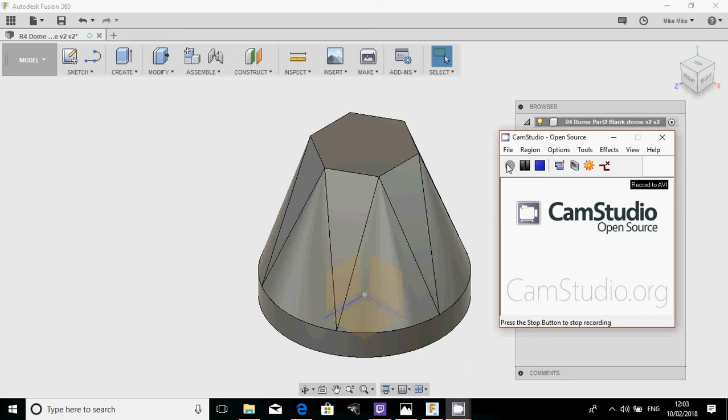This is episode 3, and what we're going to do is start to add some detail. So, recap on last time. What we did is we created the basic shape, we hollowed the shape out, and now what we're going to do is add some detail. I showed a little bit how we add detail, but what we're going to try and do today is recreate the R4 Dome that is in A New Hope. So we're going to start the ball rolling on that.

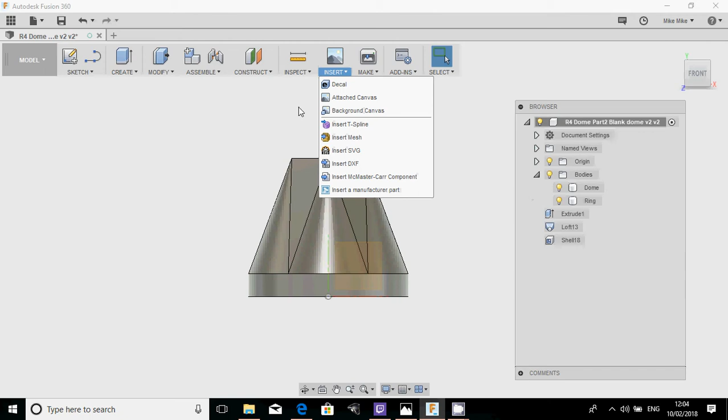So as well as designing the dome, this is also about showing you different tools, different techniques, different features. And today I'm going to show you a good way of looking at references. In Fusion there's something called canvases, and if you click on insert and attach canvas, a canvas is an image that you can attach to a plane as a point of reference. So I'll just show you how that works.

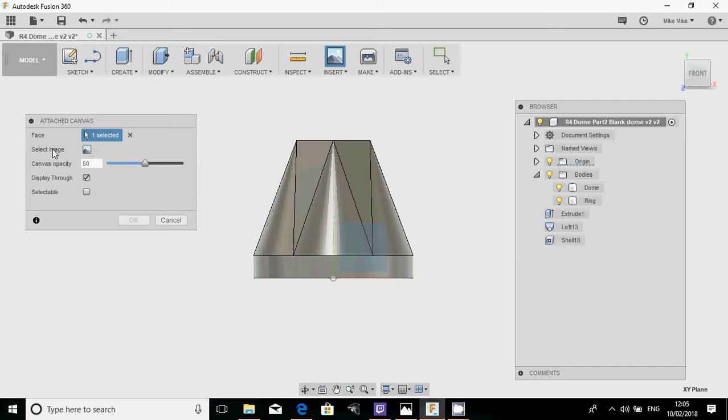So attach canvas, first of all it asks you for a face. As we know, you've got different faces. We're going to select, if you're looking from the front, the main face that you can see. It will then ask you what the image is. I'm going to use, in true Blue Peter style, one we prepared earlier, the reference image, and what that's actually done is it's attached the dome to this canvas. Now you can see that picture is very tiny, so we're going to resize it.

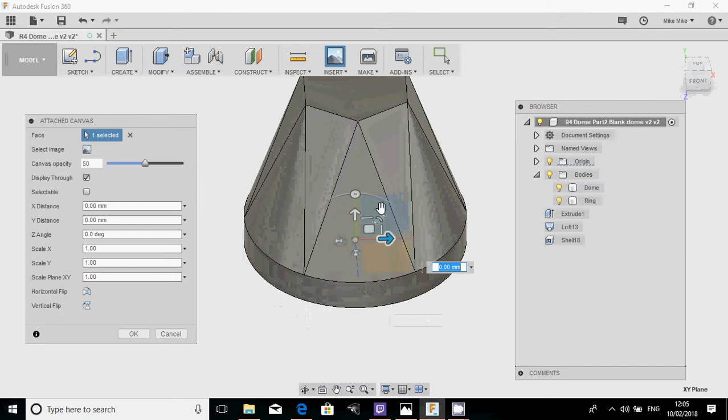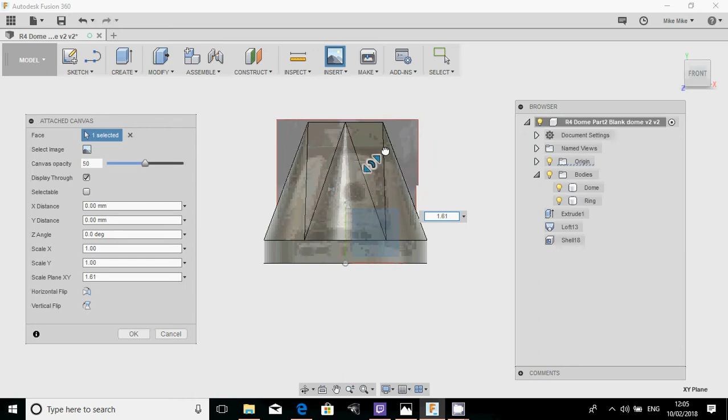Now, I didn't really go through a lot of these tools for moving and sizing objects, but what you've got is effectively this little bar and a slight curve bit that allows you to resize things. So I'll show you what that means. You drag that and you move it and it makes it bigger. You drag it again and move it, makes it bigger. So we're going to use these arrows to move it around in space, and effectively we want to make the dome roughly the same size as the one that we're actually creating. And also we might want to tweak the angle a little bit so it's a little bit straighter.

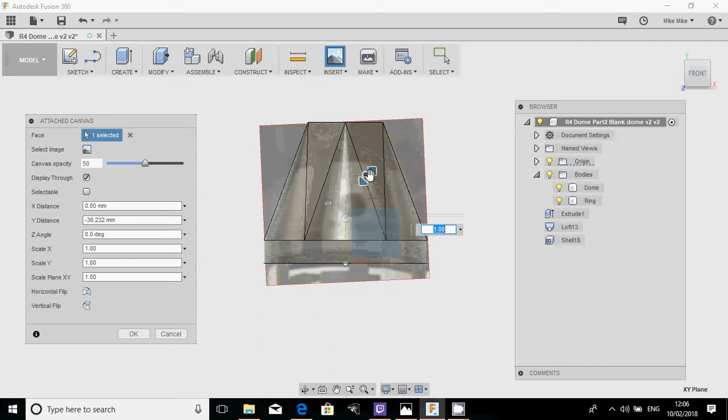So really all you're doing is putting a little bit of a backdrop of something that can be a reference image for some of the size and scale things that you're doing. Obviously if you've got blueprints with measurements, they are a lot more accurate, but where you haven't, this is quite a good way of pulling in reference material from movies or images that you've seen on the internet. So effectively that will do.

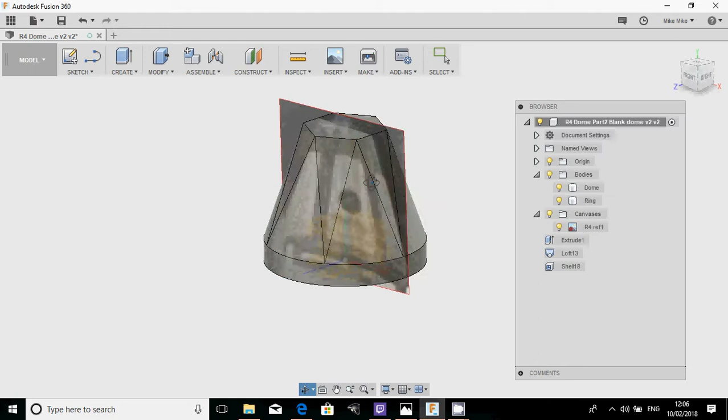You can also do all sorts of things. You can make the canvas darker, less opaque. You can make it selectable, so a bunch of stuff on there, but I'm just going to add that in there. So what that gives me now, as you can see, is an attached image at the back, which is a bit of a reference. And what we're going to do is effectively start to cut this up now so that we can start to add the detail.

So the first detail I'm going to add is this top green piece, and then I'm going to add these arms going down. And I want to make them not as panels, but having channels between them, a bit like R2D2 panels have. Now I know the panels in R2D2 have a 1.54mm gap. So first of all I'm going to go to sketch and select line. I press the L key for that because shortcuts tend to make things quicker.

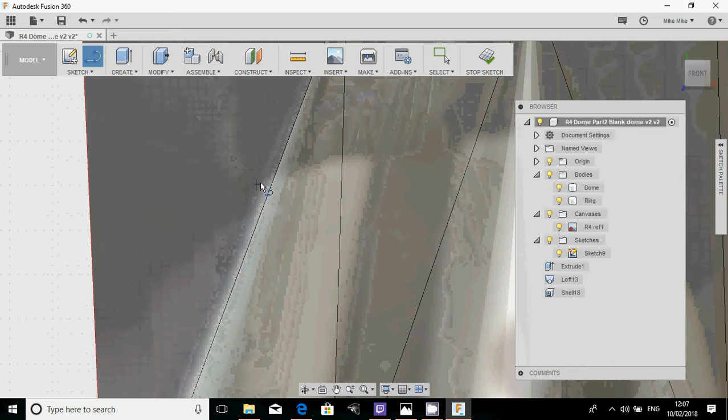And I'm going to select that back plane. And what I'm doing first of all is I want to chop this piece here off. So I'm going to take a rough guess of where I think I want to chop it off, which will be up there. I'm going to pull it out at whatever length, at 180 degrees. And I'm going to pull it back down 1.54mm.

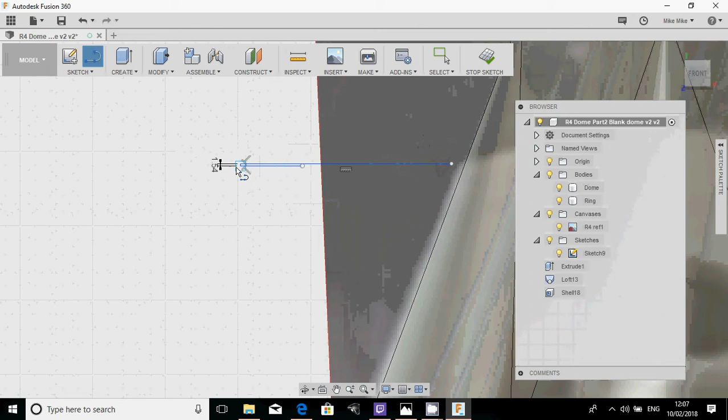And then I'm going to pull it back again a little bit. It doesn't matter how much. And then once I've done that, I'm going to click OK. So what I've created there is almost a little bit of a sketch loop out, down and across. And I'll show you why we've done that when we start to cut it. So I'll click on Stop Sketch and I'm just going to split that body.

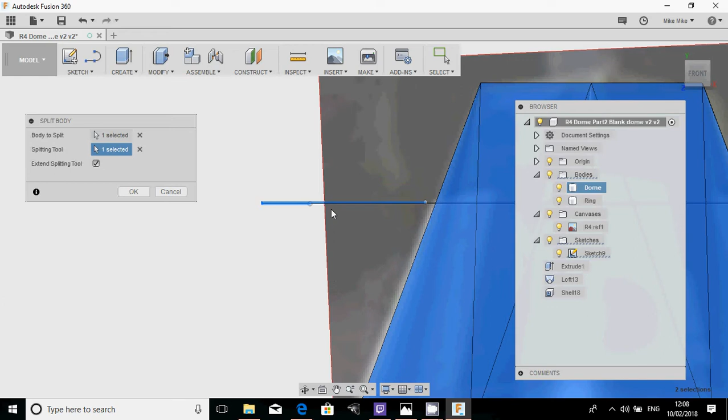So Modify, Split Body, select the dome, the splitting tool, I'm just going to select that tool. So what's happened now is because it's a continuous sketch, the knife kind of goes back on itself and zooms out across the dome like two laser beams. Click OK. And what it's done now is it's created that extra piece in the middle here, which is the detail. So the dome now consists of 3 parts, which is the top, the middle and the bottom.

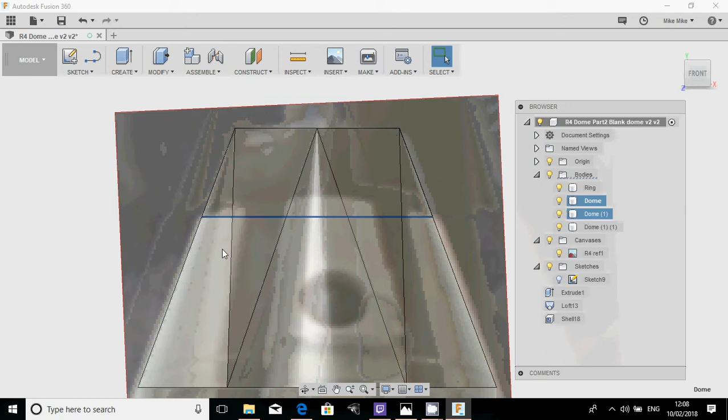So that lets me now add some more detail, which I'll show you how to do. The next thing I'm going to do is these vertical lines here. Okay, so those I know are sketched onto this panel here. So what I'm going to do is I'm actually going to try and sketch these on top, and I'll show you why I'm doing that in a minute.

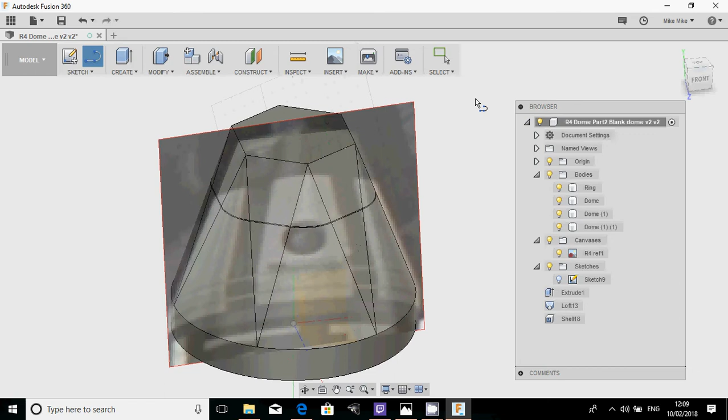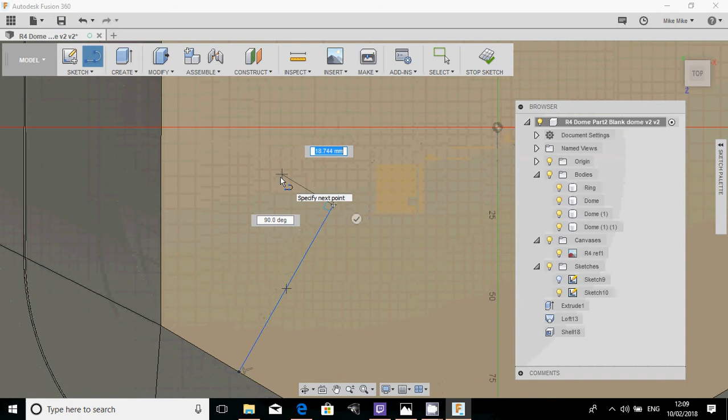So I'm going to look at roughly the size of them, and I'm going to press L, and on the top of them I'm now going to create a couple of lines. Okay, so I'm going to pull it in to probably, let's go for about there, and then I'm going to draw that line at exactly 90 degrees to that space there. Okay, same as before. 1.54 mil, tick. I'm going to do another one at an angle there, and I'm going to go back out like that. Tick that like that, okay.

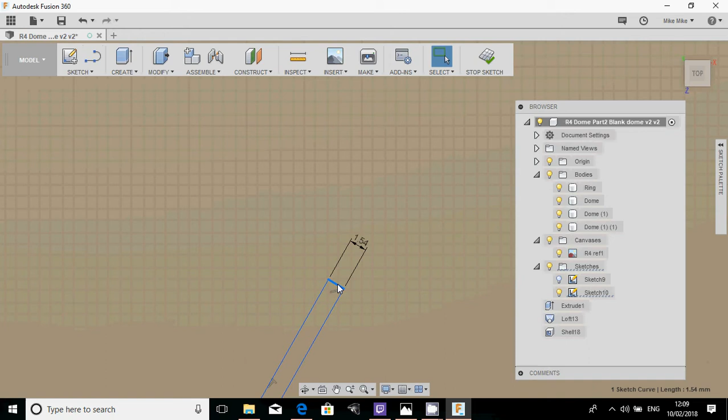But this time I'm going to hit escape to come out of line, so I'm just going to get rid of that little joining line there, and I'll show you why in a second. So that now is effectively, if I cut that there, let me just show you, modify, split body, and you can select multiple parts when you're splitting, and I'm going to select one of those lines, okay, and then what I'm going to do then is modify, split body. Remember, when you've used a sketch it disappears, so you have to bring it back on.

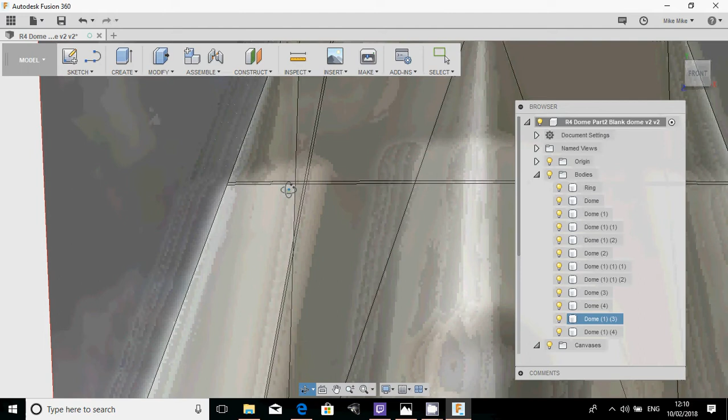I want to now split with that second line, and I'm effectively going to split all of the dome, so I'm going to select all of the dome pieces there, and I'm going to select that second line there. Okay, right. So what that's done now is, go to front, it's created that detail line, so I can look at this and say, does this look about right? If anything, it probably looks a little bit too thick. Let me just have a look at that.

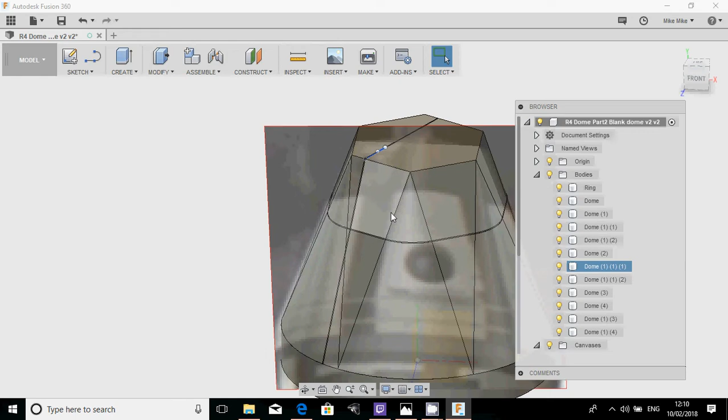Just look at the picture. So there's your lines, right? No, actually, I'm probably happy with that. And because you're working off images, this is what you've kind of got to do to see how accurate it is, and you can always tweak it later on if you want to. So that's given us one of the lines. Now, just after testing that, I'm just going to undo that so we remove the cuts. I'll show you why we're going to do that in a second.

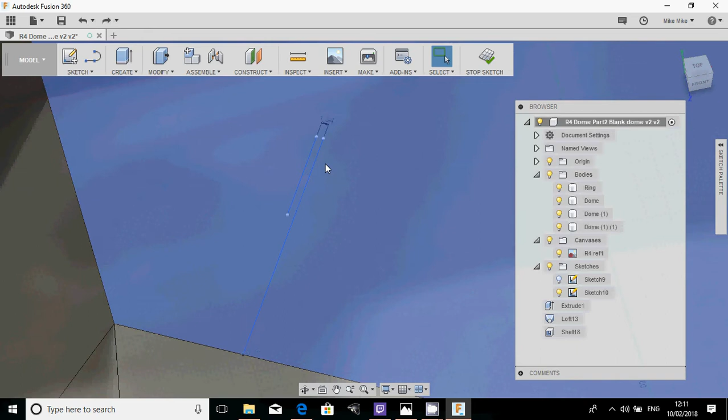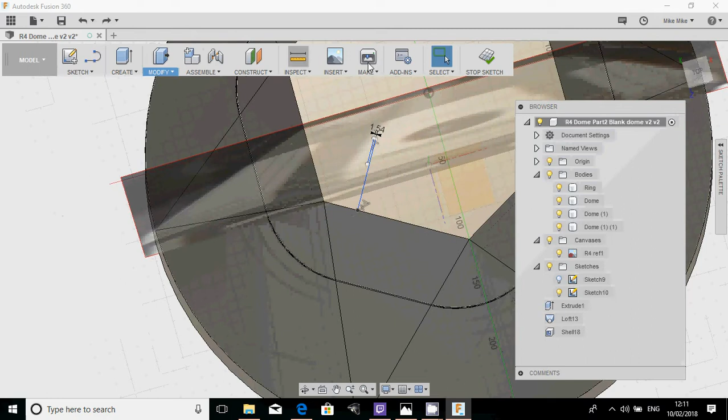Okay, so I just want these two lines left here, and I'm still in sketch mode. The next thing I want is the same on this side, because this effectively then creates that band. And the way I do that is I'm going to use some sketch commands. First one I'm going to use is something called mirror, and I want to mirror this line along the center here. So first of all, if I click on sketch line, what I've got to draw is a reference mirror line.

So if I hover along any line and you move it to about the center, it will find and lock into the center, and that's going to be the mirror point for these two lines here. So I've done that, tick, and then I'm going to go sketch, mirror, and I'm going to select both of those lines, and the mirror line I'm going to select is that, and that will create a perfect mirror for me, so I can start to cut the dome up. Okay.

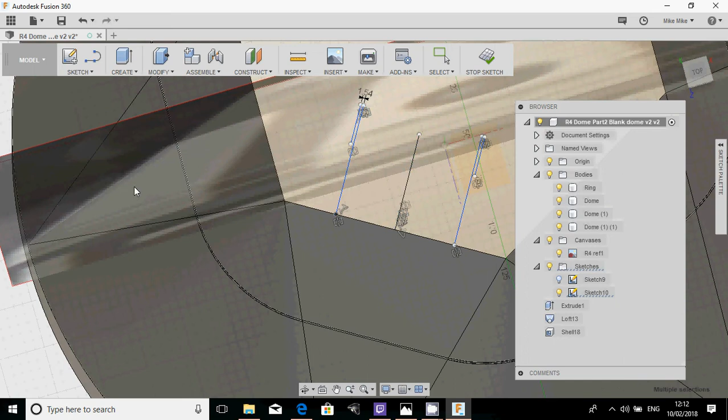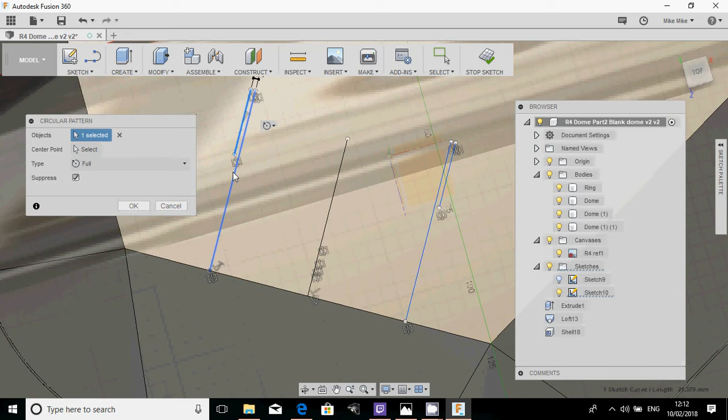Now, that's great, but actually I want to cut all of the dome up. So what I'm going to do now is a sketch. Instead of using a mirror, I'm now going to use a circular pattern. We saw this with the objects, but you can do exactly the same with sketches. So I'm going to circle that one, that one, that one, and that one.

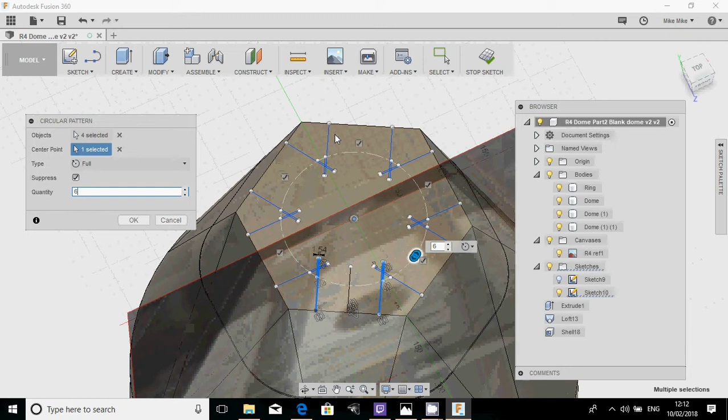The center point, I can select the center point here if I want to, or as I've always done, you can, but it's got to be a sketch that you're selecting. So I'll select the center point on there. And you can see now that's started to do 3 of those. I actually want 6. So now I've got the lines to cut all of the dome. I'm going to click OK.

So the next thing I'm going to do is chop the dome up. Now this will mean that I will have loads of pieces in here in the browser, but let's just go through that process.

So I'll stop sketch. I've got my sketches up there that I'm going to start to chop the dome up. So modify, split body. I'm going to select the top dome, press the shift key and select all of those, and the first line I'm going to select is one of those sketches. As always, when you've used a sketch it disappears, so I need to make it reappear again.

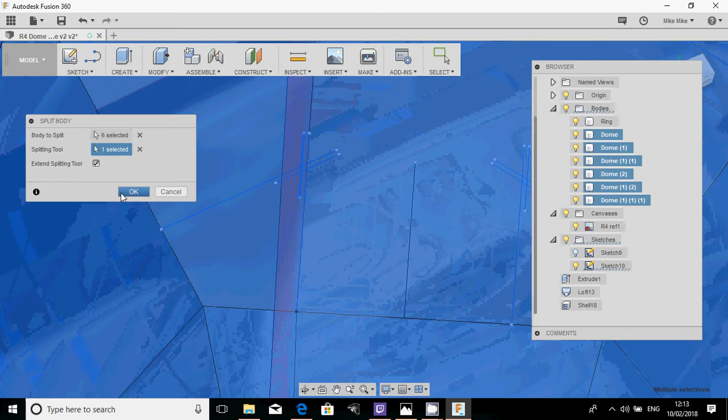And what I'm going to do then is modify, split body, and I'm going to select that, all of those domes again, and I'm then going to select that second line like that. Okay, so now as you can see that's given me the one split, but because it goes right the way through all the bodies, it's actually given me 2 faces. So I only need to do this 3 times, and I'll show you what I mean by that.

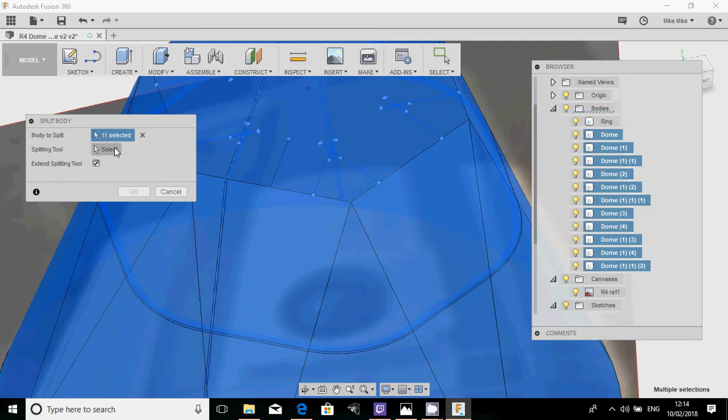So modify, split body, okay, and again I'm going to select all the domes because I'm not bothered where it splits. Splitting tool and that new line there, okay, and the same, I'm just going to repeat that, body to split body, and you can see the parts as they all start to create, and the splitting tool, I'm going to use that line there, okay.

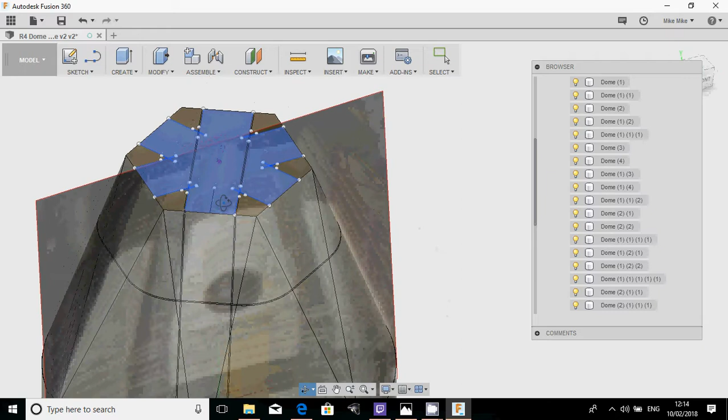So now what I've actually got is the first bit of detail across two faces, and what I really need to do is repeat that on all of the rest. So modify split body, and again, don't worry about the number of parts you've got because we are going to pull them all back together again. It's just this is probably the quickest way of doing it.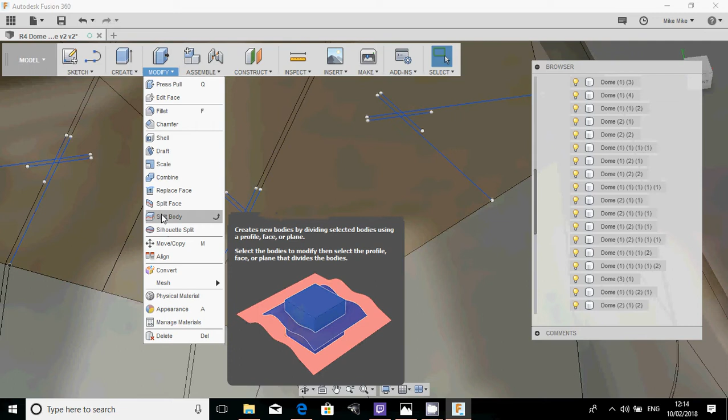I'm going to select that line first of all, okay, modify split body, yeah, again you can see the amount of dome pieces that we're getting now. There we go, select, and then that second line, if we can find it, which is there, okay, and then modify split body.

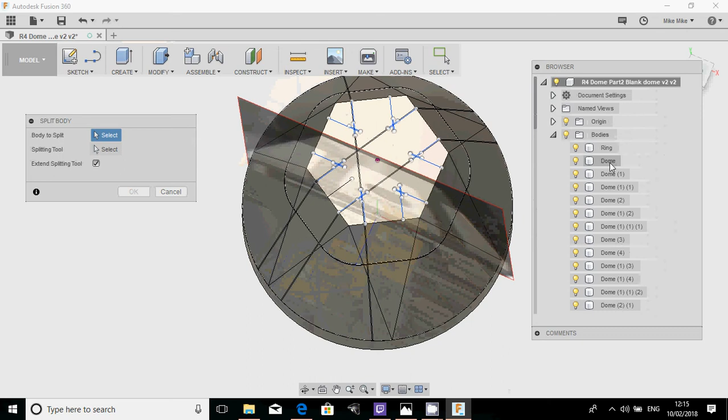I know, loads of these dome pieces now. We've got lots and lots of dome pieces in. Select that line, okay, modify split body. Again we continue to split to create lots and lots of domes. Look at all these dome pieces here. Select that line there, okay.

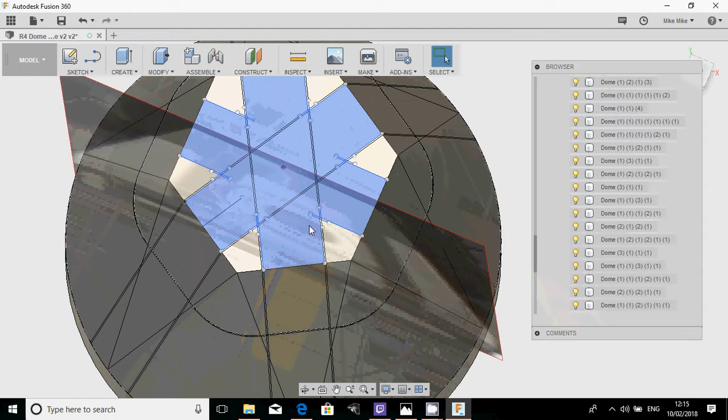So now we've done two of the three faces, so we've just got the final one to do. Modify split body. Let's go through all of these domes. So this can be quite off-putting because you think, oh my god, there's loads of parts. Don't worry about it, because we're going to bring it all together in a bit.

So what's annoying with this is it would be really useful if you could actually select more than one splitting line, rather than having to repeat it. But it will let you select multiple bodies, thank god. But it will not let you select multiple lines. So we just repeat that with that one.

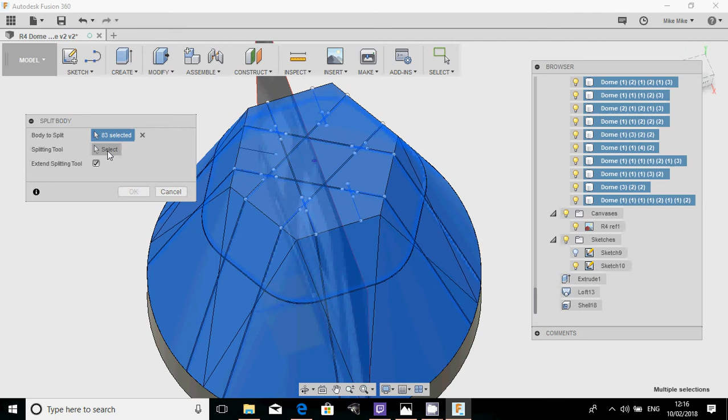Nearly done now. Okay, and then modify split body. Let's just go right back up to the top again, and you can see the number of parts we've got now. We had 70 last time. God knows how many we've got now. 83. That line, okay, and finally modify split body.

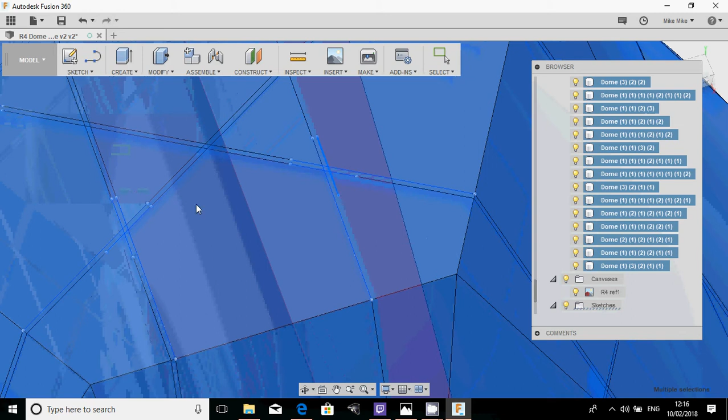That one, right down to the bottom, press the shift key, select, and that final line is that one there, okay. So what you've actually got now is we've now got all of our detail.

I have unfortunately also slightly cocked that up, because what I wanted to do was to continue the splits down to the lower ring as well, but we'll cover that off in a second.

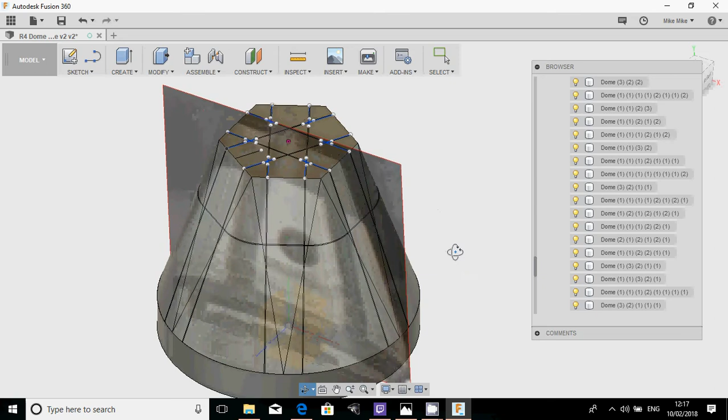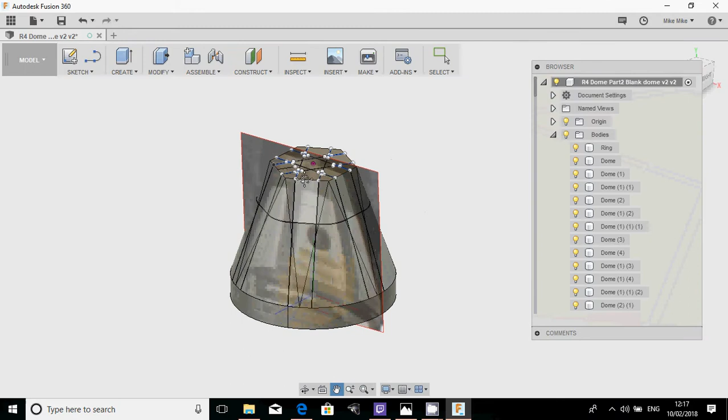Okay, so what I'm going to do now is modify split body, and I'm going to do the same again with the ring. So ring, select, and what I will do is I'll just select that one there, click OK. What I didn't do, I should have probably done, is selected the whole piece when I was actually doing that.

So what I'm going to do is I'm just going to do the rest. I'll just pause the video so you don't have to sit through a lot of repetitive stuff, and we will see the final results. One sec.

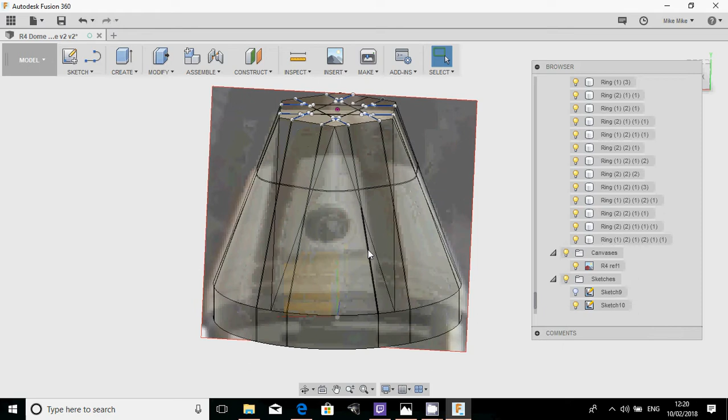Okay, so what we've done now, as you can see, is I've just gone through and finished off that splitting of the ring. It didn't take too long actually. So now we've got the start of the details. We've got lots and lots and lots of parts here, but don't worry about them just at the moment.

So the first thing I'll do is just tidy the space up a little bit, because I need to do so. I'm going to get rid of the sketches, like I said. I'm also going to hide that canvas so you can see the actual model.

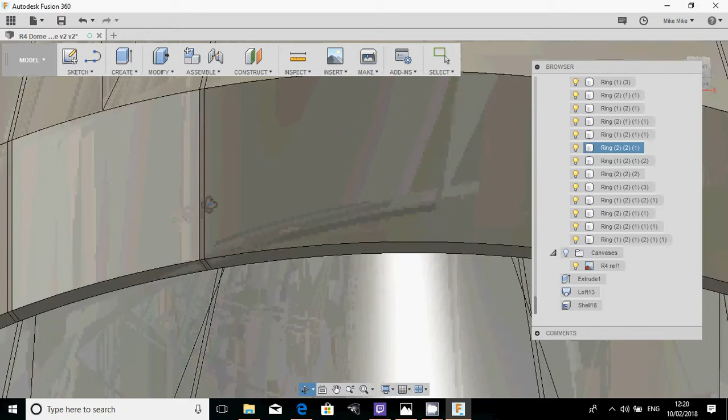So what we're going to do now is we're going to start to create the little recesses. So, and I'll show you how we do that. What we're doing is we're selecting the face, and we're just going to press and pull.

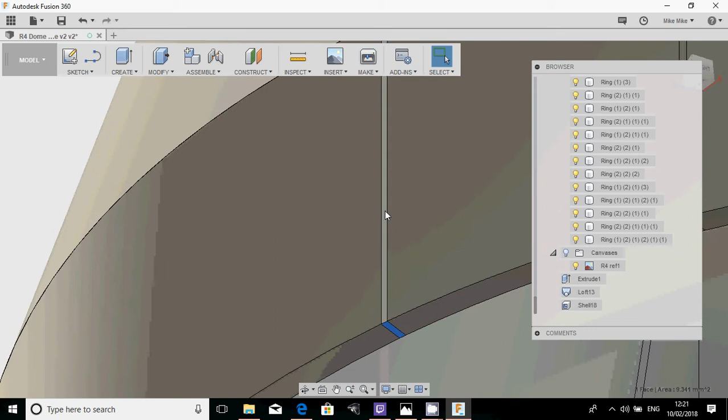Okay. Now, what I want to do is I want to effectively press and pull the face. And if I select anything that is curved, when you start to do press and pull, it actually starts to give you the radius number, which isn't easy. Whereas if you do a flat piece, you can just highlight minus 1.54.

So what I'm going to do is pull the pieces in that I want to do about 1.54 mil in. And I'm going to do these in different areas. Press pull minus 1.54. Okay, so if you look closely now, what I've just done there is I've just taken that one piece in by 1.54.

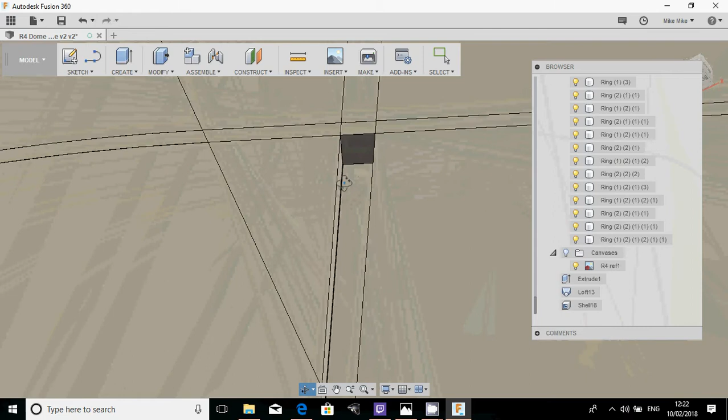And what I want to do now is start to sketch out, and if we go back to the reference image, I want to sketch out these white panels with the edges. So the way I do that is I can multiple highlight if I want to.

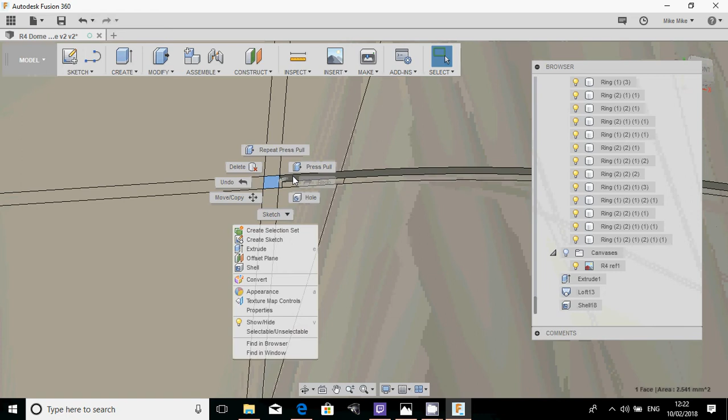Press pull 1.54. Okay. Do the little square in between, and then do this one here. Okay, so what that's actually done now, if you look at it, that's created the channel.

On the droid that's on the screen, these were probably just flat painted without channels, but if you're printing, it's easier to paint this way. It looks a little bit neater as well, so I'm just adding detail. I'm not saying it's movie accurate.

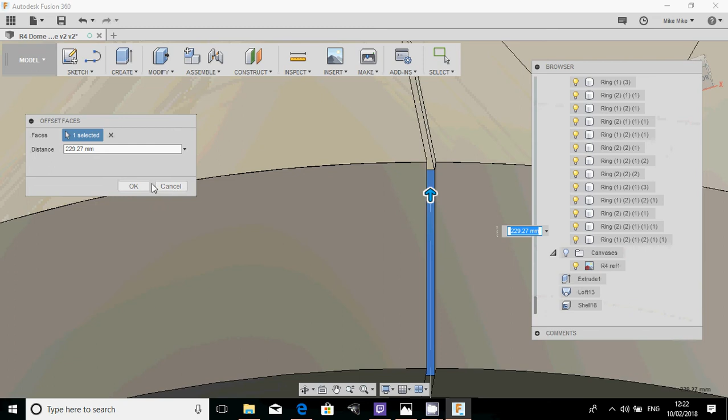Now once you've done a pull for 1.54, if you go and start to do curved pulls, it doesn't show you 1.54, it just shows you a distance, which is the radius, but it will automatically apply the last pull to that radius. So that is actually going 1.54 in on a circular one.

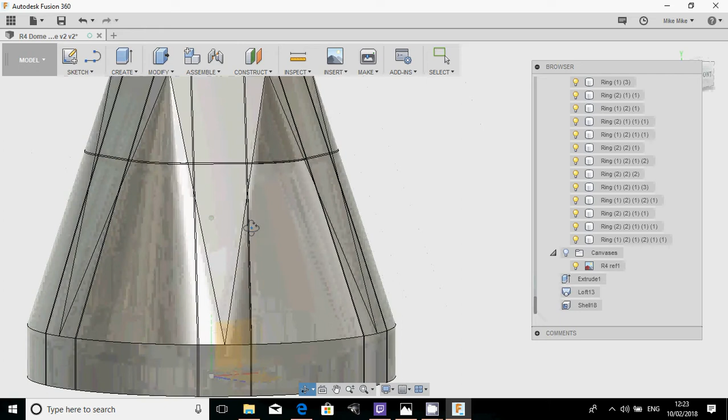So what we've done is we've done that for that panel. We're going to do the same for this panel. We're going to just really continue to repeat that as we go round the droid. So press pull, and all you're really doing is highlight, right click, press pull, press OK, because it's remembered that the last time you did it was 1.54.

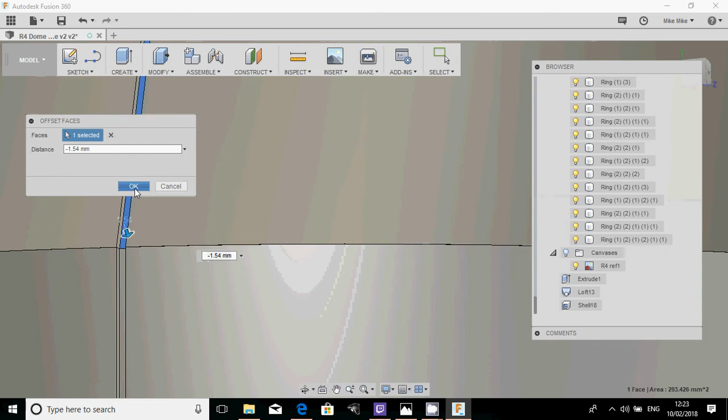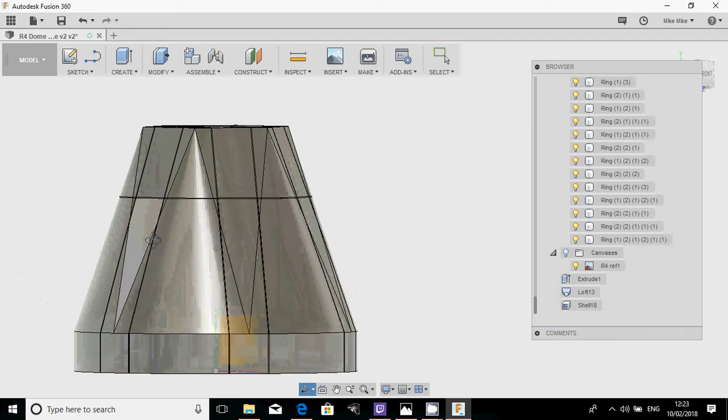Okay, and then don't forget these little corner blocks here. Okay, and we'll just do that again. There you go. Okay, so that's two of the panels, and you see where we're up to. We're up to there. So the next one's this one here.

So you can multiple select if you want to.

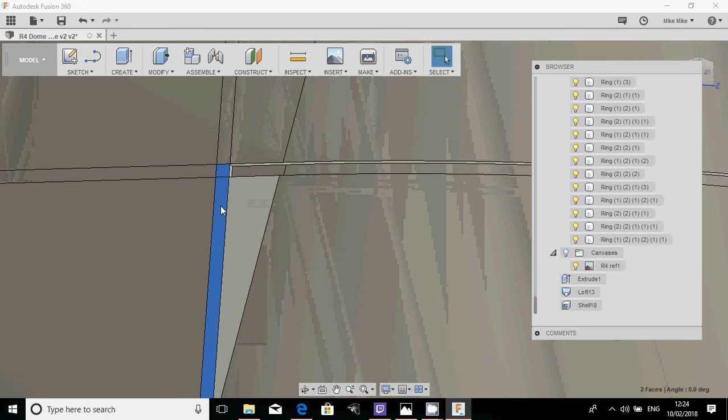Okay, and you just repeat that like that. So what you're actually doing there is you're starting to put the detail into all of these little faces, etc.

Okay, there we go. Okay, and then we can do the next panel, which is this one here. So we'll select that one, press shift key, multiple select, go up a little bit, press shift key, oops, not that edge, that one, press pull. Okay, and then we'll do that one, press pull, okay.

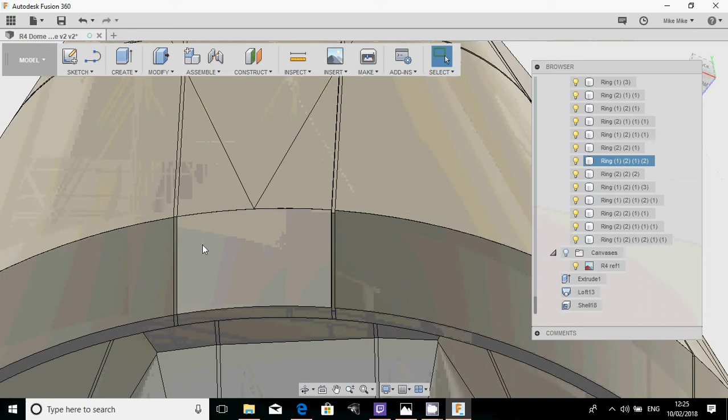So as you can see, and to be honest, doing this kind of stuff is quite good practice from playing around with Fusion and learning how it works. So the way I would kind of do it is I'd just start multiple selecting on the ones that I want to do, just because it's quicker.

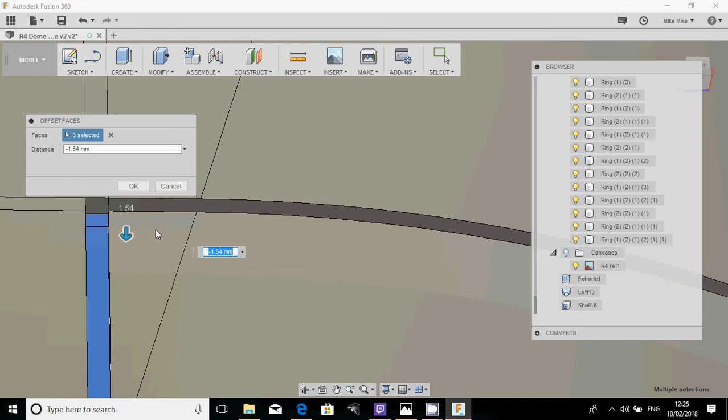And what you're trying to do really is continue around the dome to make that detail. Computer just froze there for a second, so it's a bit of a pain, but there we go. Let's have a look at that, and then that one, press pull.

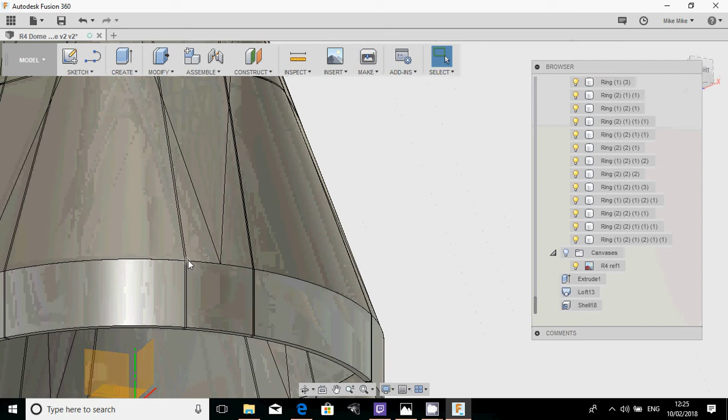Okay, so yeah, a lot of work in Fusion can be quite repetitive like this, but this is really as you start to add the detail that you want for your droids. So press pull.

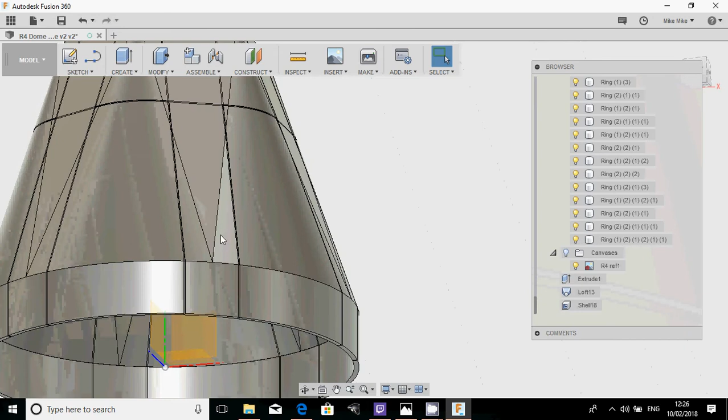Okay, and obviously there's different tools that you can start to combine in Fusion when you start to use things like rotate, sketches. There's 100 different ways of actually achieving the same results. So what generally the way I tend to do things is very similar to this, which is I just take basic objects and start to cut them down and add the detail.

Now that looks like we've now completed all of that detail around there.

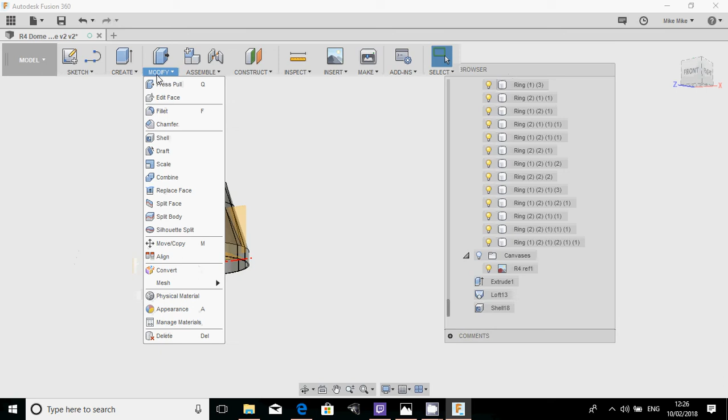Once that's happened, what I'm going to do now is put it back as a single unit. So modify, combine, and I can now select all the rings, so I'm going to make the ring one object again. So press that, shift, combine. It's under join, click OK, and now the ring is back to being a single piece, but it does have the detail in it.

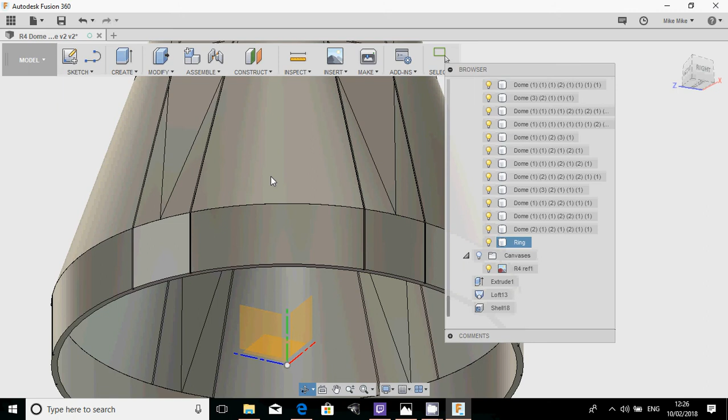Okay, it's very similar process again for the dome. So yet again, and Fusion just starts to slow down when it's got loads of details and things, so it will speed up. So top dome all the way down, so modify, combine.

Right down to the bottom, press the shift key and highlight all of that. Oops, actually let me just do that again so it's a bit clearer. So it was because I had an item selected. So modify, combine. It's asking me for the target body, which is the one actually that it retains the name of, so I use dome, so it's tidy and saves me having to rename it.

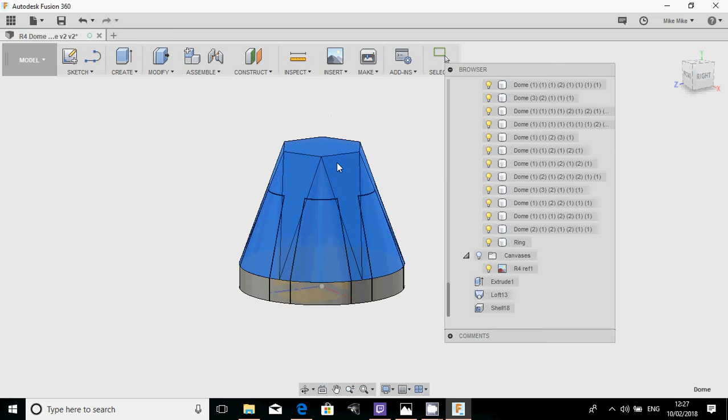Scroll down to the bottom and press shift. Okay, there we go, they're all selected. So that's 108 pieces it's going to join. Click OK, and what that will do is effectively now create the dome and the ring, yay, with detail.

Okay, if you look round now, you can see what it's done is it's actually created the little recesses, it's created the little panels. So that gives us the first layer of detail to recreate this dome.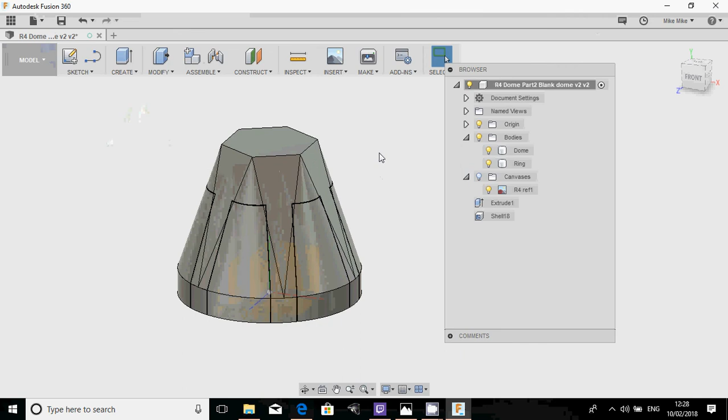The next thing I'm going to do is just make it look pretty, and then I think we'll finish on this particular video. And what I mean by pretty is we're going to apply some colour so it looks nicer.

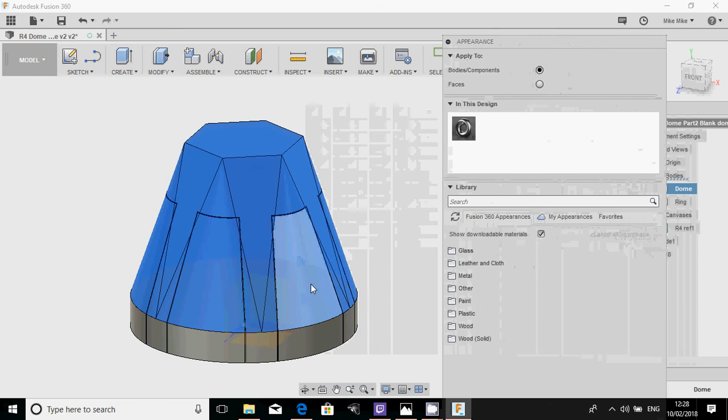So if I right click on the dome or any item and click on appearance, it'll take you into a new piece here, which I don't think we've gone through before. And what appearance is it allows us to apply different colours to different elements. And you've got a choice of faces or body and components. At the moment it's steel satin, which is default.

If you go into paint enamel glossy, there's loads in there. So we're just going to do a basic white and probably a basic green. I think if you double click on them, yeah, you can darken them up a little bit. So we'll darken it up just to kind of make it look a bit interesting.

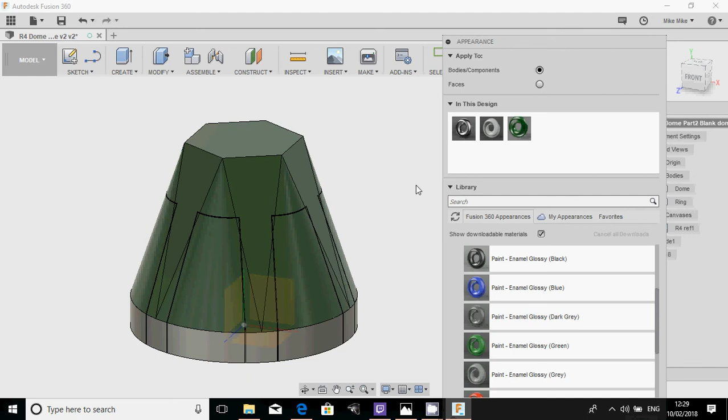And then what you do is if we click on bodies and apply that, it'll make the whole dome green or back to silver. And if we click on faces and do that, it will just allow us to colour individual faces. So what I'm going to do is I'm just going to start to colour individual faces.

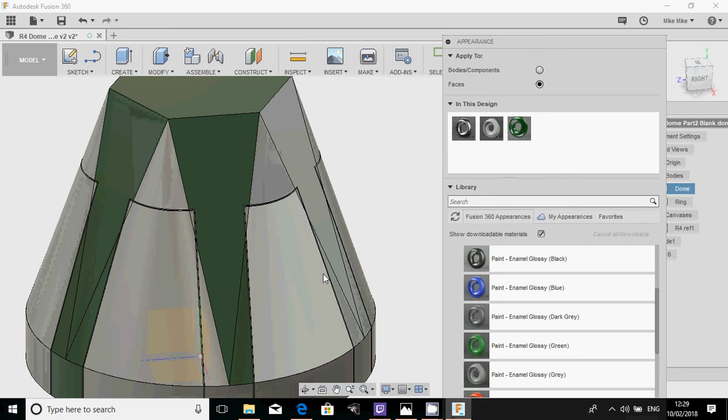Obviously for printing this makes no difference whatsoever, but when you're designing, it's quite therapeutic, I think, and it also lets you start to see what the final droid image is going to look like. So I'm just going to colour in all of the pieces that I want to have green. I've realised here that I could have severely saved myself a lot of time, and I'll show you what I should have done.

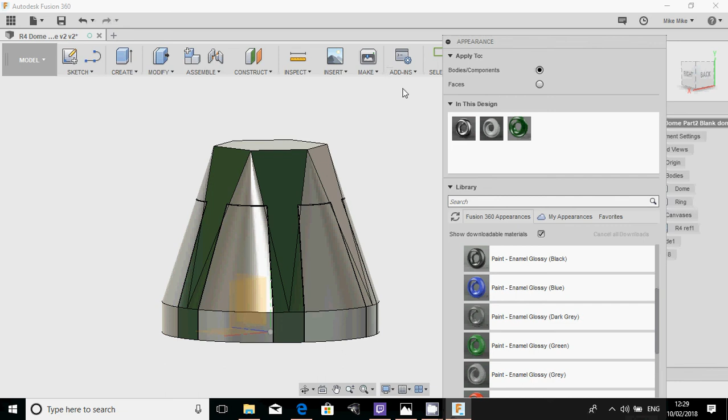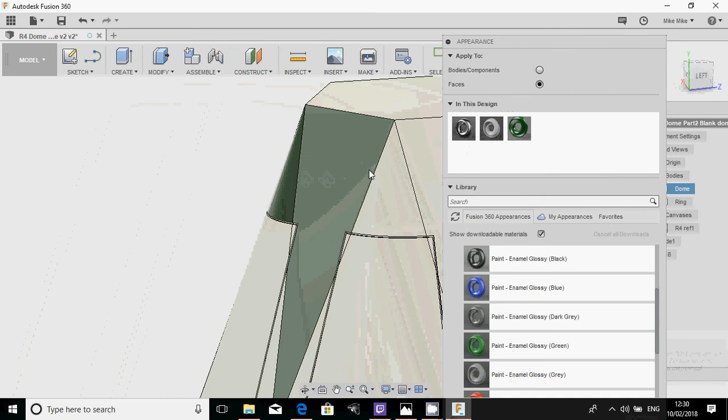So go to bodies and components and apply white. It warns that it will remove all the work I've just done - okay, that's fine. I'm going to do white on the bottom one, remove, yep. Then I'm going to go to faces and start to add the green into the faces, because that way I'm not going to have to go back and paint things white, which is what I thought I might have to do, hence why I stopped halfway through.

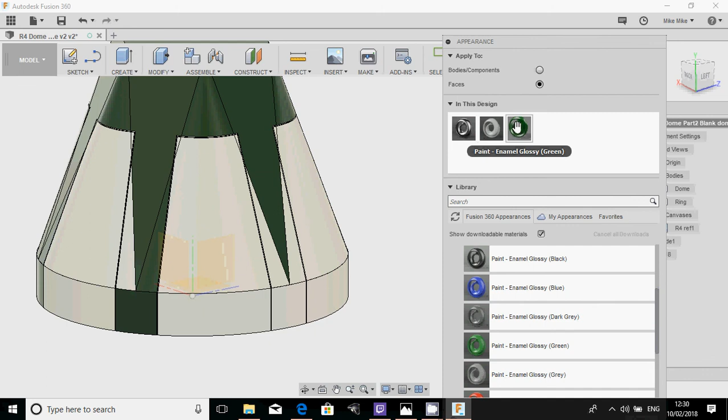So I'll just drag these onto here, make that green top. It'd be really good if it was this easy to paint the domes in real life, wouldn't it? Then I'll start to do these bottom pieces like that.

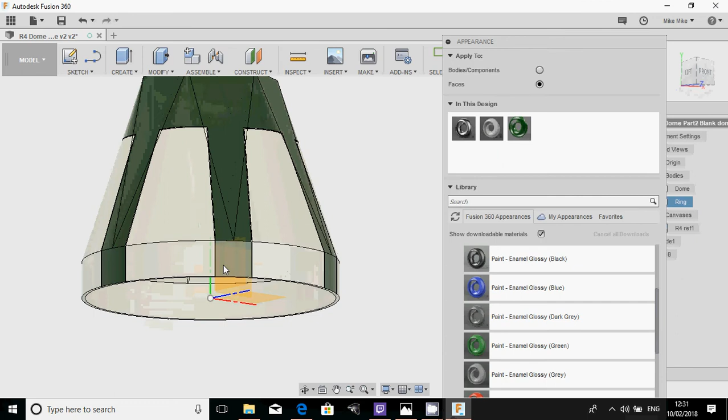So what we're doing now is just colouring in the dome so it looks a little bit more in line with the movie one that we've just looked at. Now, there we go - so now we've actually got quite a nice model of the dome. Just going to close appearance. There we go, go back to normal view.

So there you go, and that I think will do us for today.

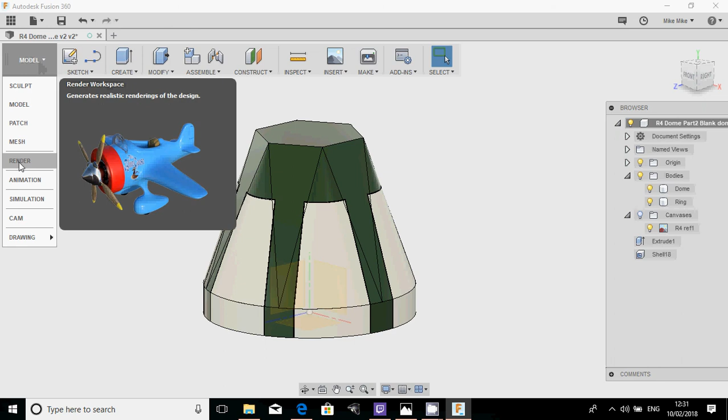What I will do just before we go is show you one of the other workspaces, which is quite interesting. You click on model and click on render. The render workspace takes what you've designed and creates a photorealistic type image of it. I use this when I'm starting to share some of the designs I've done before I printed them. You can literally angle it at whatever angle you want, and it gives you a nice kind of semi-render, which it's got at the moment.

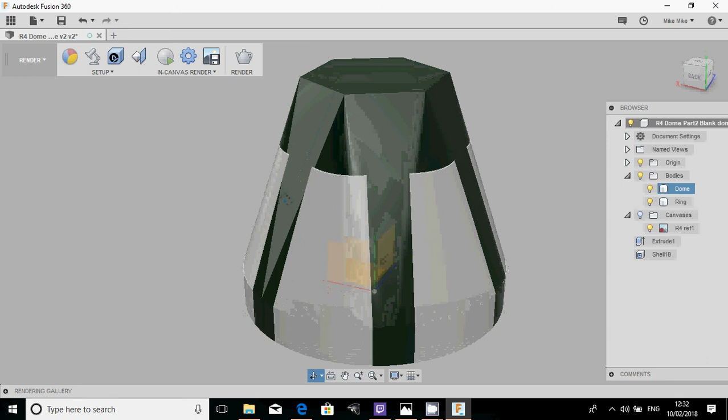But what I like to do is a bit more of a photorealistic one. So what you've got in there is this button, the in-canvas render. What this actually does is real clever light scattering, which is obviously a lot cleverer than what I understand, but what it starts to do is bounce light around. So what you end up with is a virtually photorealistic rendering of the item you're doing.

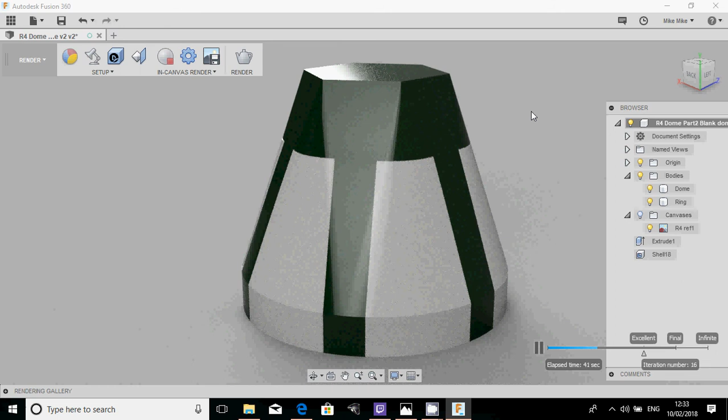And across the bottom, you've got kind of - if it gets to this point, it's excellent, and when it gets to this point, it's final. So you can leave it a little bit until it gets to a stage by which you're happy, and I typically would screen capture this to share the design so far. Okay, so that's a little fun thing, I guess, on render.

I'm going to drop back down to model now, and as you can see, that's where we are. So I will save this dome as Dome 3, along with the videos. In the next one, we've got a final bit of detail to add in - you can see these lines here, then there's some little panel details you can just make out, which will freeform a couple of panel details to show you how to do that on flat and curved surfaces.

We'll start to add the eyes in, so what we'll do is start to build the dome up. But hopefully that's useful, and I look forward to going through this on the fourth one. Obviously these are all there really for you to do what you want with - if you want to add, create and change things, add extra patterns, it just gives you more flexibility to create yourselves a unique droid.